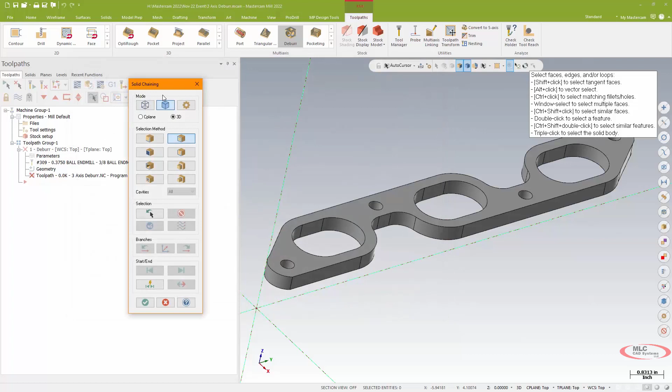want to. Setting it to user-defined, I'll go ahead and click to define those edges with my chain window using a solid chain, and I'm just going to be doing loops. So I'll start with a loop around the outside edge, and if you notice, solid chaining these days is almost as easy as using wireframe. Relatively painless to do.

Not too concerned about direction. It will do these as a climb mill because I'm going to tell it to do it as a climb. So as long as I get the basics there, I'm good. That looks okay to me. So I'll go ahead and I'll green check to get back into my dialog.

8 edges defined. We'll be doing a constant width style at 20 thou, just standard issue kind of stuff. It's enough to see it. And this will be a traditional flat style edge break, so one pass should get it done. I'm then going to go to my tool axis control and just confirm that I am limiting this to only 3 axes, so good for a vertical mill.

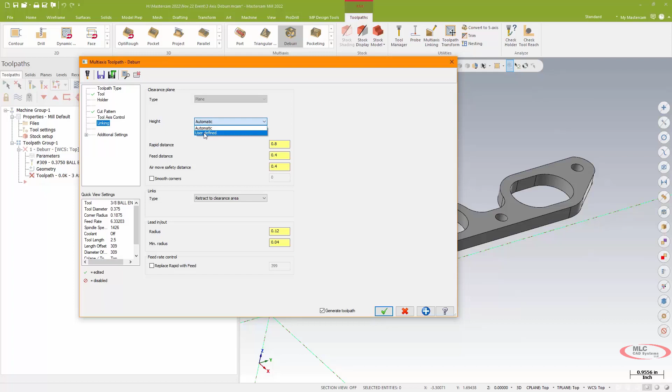And then I'll go to my linking parameters or my linking page, and I'll just go ahead and tighten everything up a little bit. So my clearance type is set to a plane by default. The height can be determined automatic, but again, I tend to do things as user-defined. It's not a terribly thick part, so we'll go ahead and make that as tight as we can.

And I'll go ahead and tighten up and reduce my rapid feed and air distances as well. We'll just drop those down significantly just to tighten everything up. My links between passes, I can either go to a clearance area, so to my 1-inch clearance defined height. In this case, I'm going to go ahead and use a blended spline. I just like that style a little bit better.

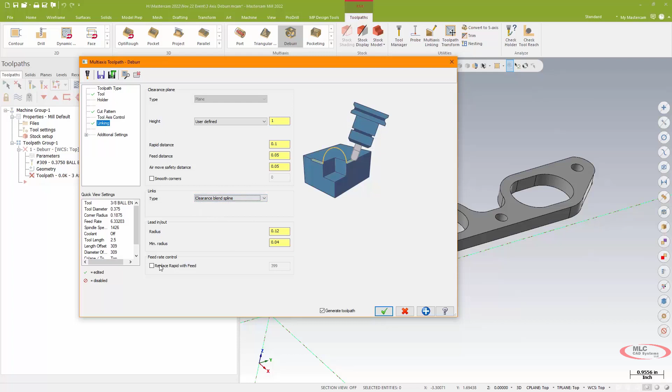And I'll go ahead and replace any rapid move with a determined feed output, just so I don't get any unwanted surprises on the machine. With that done, I'll go ahead and green check and generate that path. We can see we've got a nice path between all those edges. Those are those blended spline links.

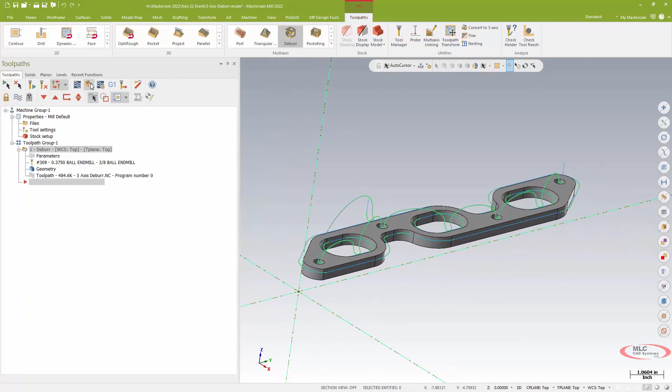We'll go ahead and take a look at this and verify and just see kind of what our edge breaks look like. So again, using that model as our stock basis, I'll go ahead and slow it down a little bit so we can see what's going on. And we should have a nice clean edge break all the way around that part. Very quick, very simple. A lot of functionality, a lot of control you can have with this path.

And you notice it's not necessarily doing it in the order that I chained it. It's doing it in the order of the feature, essentially, that's next. So I did the outside edge and then the pockets and then the holes. It starts with the outside edge and then basically takes the interior features sort of as they come.

And you notice everything's being done as a climb, even though some of my chains were not chained directionally for a climb mill. So very quick, very simple. And a very effective little toolpath, even if you don't have a 5-axis machine.